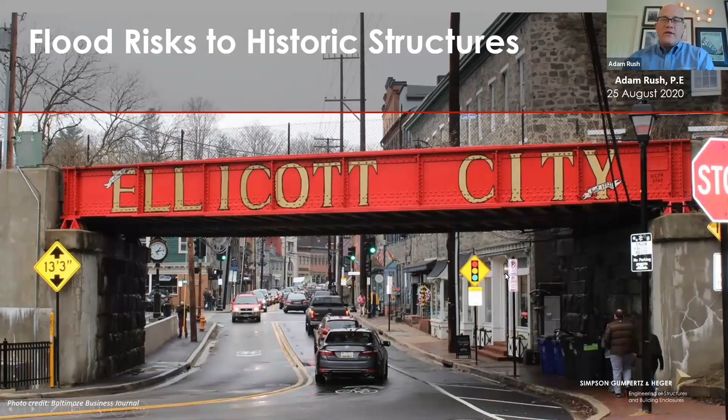So, kicking off, I'd like to talk about the outline real quick to try to give a sense of what we're going to cover today. So we're going to start off with the background for Ellicott City. We're going to talk about the history of the town a little bit. We're going to talk about the recent floods that occurred there. And we're going to talk about what are the goals and what are they doing to move forward as part of their recovery effort. And from that, we're going to focus on one specific building to help tell that story, and that is Caplan's department store, as you can see in this photo here.

The location of this structure is at a critical juncture within the city, and there's a lot that is going on with this building and the preservation effort behind it that really tie into the larger flood concerns and larger preservation concerns for Ellicott City. Now, we're going to use Caplan's to talk about a conceptual flood mitigation study that would occur using code prescribed methods and procedures in order to understand how to think about flood mitigation for historic structures.

Then we're going to take what we learned from that conceptual study, we're going to bring in the recent history and the efforts going on throughout the city, wrap it up to talk about how that ties into the project moving forward with Caplan's, and open it up for questions at the end of the presentation.

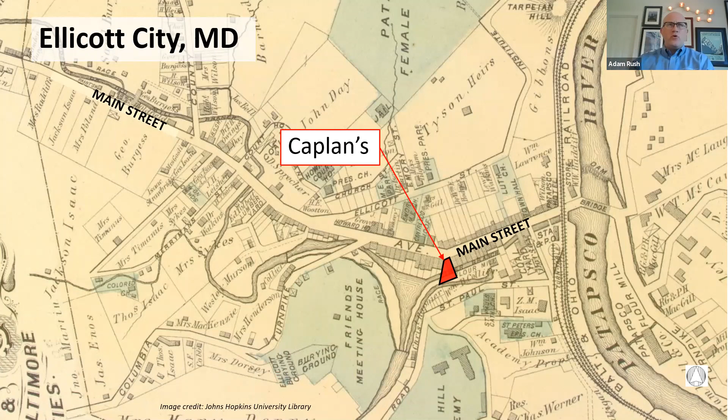The Patapsco River runs from the north to the south, and Main Street crosses the Patapsco River near the east end of Main Street. I'm going to put on a highlighter to try to point things out, and hopefully this works. We'll see how that goes as we move along. So Caplan's department store is located at this corner on Main Street, where Main Street turns in a bend.

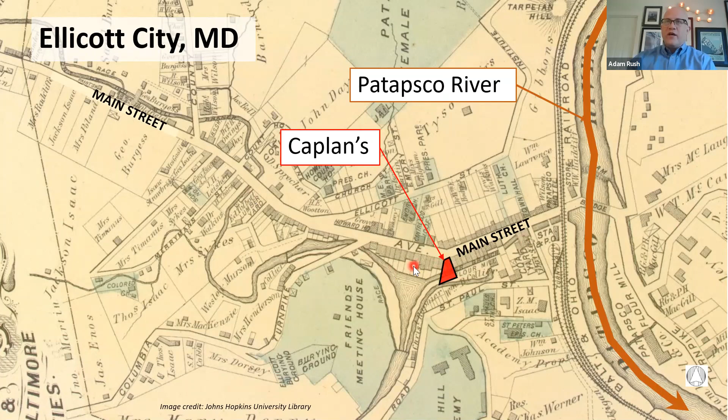So the location for Ellicott City was chosen for a mill town because of the confluence of a number of tributaries to the Patapsco River, creating a constant source of water in order to power the mills. And so they constructed Main Street along this channel where the Tiber branch meets the Hudson branch and New Cut branch and runs parallel to Main Street.

Now this city has a history of flooding, and traditionally floods would come from heavy rain events up in the watershed of the Patapsco River and would cause the river to increase in elevation and have the waters back up Main Street. So you end up getting high water levels, but the flow of the water is relatively slow within the downtown area.

However, due to development within the watershed of these creeks or these streams, we found that the nature of the flooding has changed for Ellicott City. Where before floods were occurring from the Patapsco River at the end of Main Street, slowly moving up Main Street as the water levels rose, they're now coming from the west and the north, where the watershed collects water and then quickly funnels it down through this channel in lower Main Street.

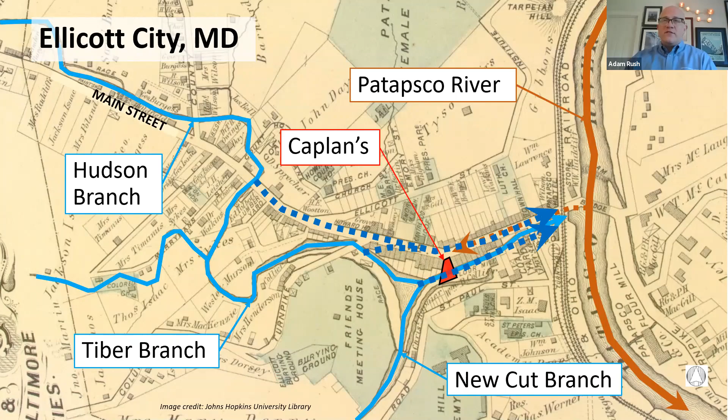And as a result, the water accumulation occurs much faster, and the level of flooding can increase in elevation pretty quickly, and the water movement is also very rapid. Now, to set this into a broader context, let's look at what NOAA is tracking for billion-dollar weather events for the last couple of years in climate disasters.

So NOAA has tracked damage from tornadoes, flooding, earthquakes, droughts, etc., and have tabulated the events for the past number of years. And as we can see on the table on the right, flood costs, though not occurring every year, can quickly accumulate, where one flood event could easily cause over $1 billion of damage. And this does not even account for all of the floods that occur that don't reach the $1 billion threshold.

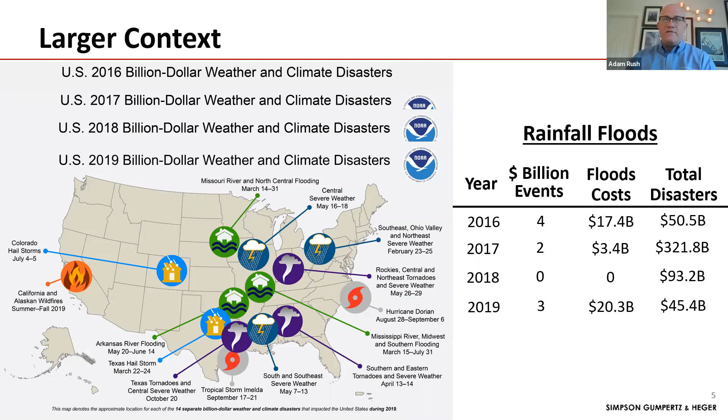So flooding is a major source of disaster, and it is a major issue that we need to confront moving forward. One of the challenges that we're going to face as a community is that projected total annual precipitation is also going to change due to climate change. So in areas of the United States, we're projected to see an increase in rainfall in the future. And so the heaviest 1% event per year, that occurrence is going to increase due to climate change.

As you can see, where we live in the DC metro area, here on the Potomac River, we're looking at, on the low end, a 20%, give or take, increase in heaviest rain events by late 21st century. So in the next 100 years, we're going to see a 20% increase, and then up to 40 to 50% at the high end of the range.

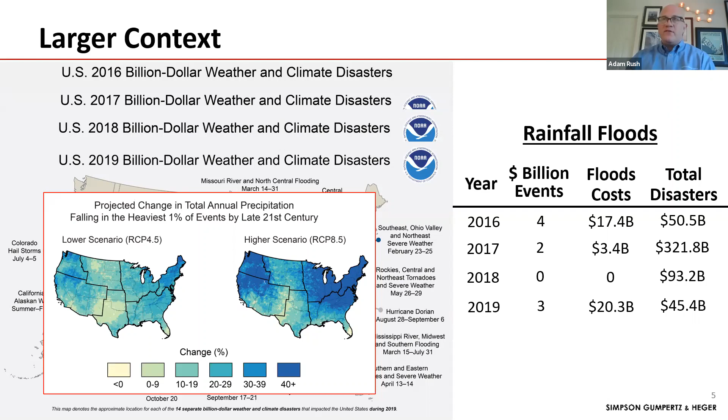So we're going to be dealing with a lot more water for our historic sites, and we need to take that into account as we move forward with our designs. So with that in mind, I want to go through a flood mitigation study using a code method in order to set the groundwork for what it is that we were going to look for.

So within this study, we're going to look at the framework: how do we put together this problem? How do we think about flood mitigation for historic structures? We're going to talk about that framework, and we're going to go into what are the flood risks, how do we deal with those risks, and then look at different mitigation strategies, and then come up with a potential recommendation for a project moving forward based on the data that's available. So this is all based on what is published and the codes that apply to Ellicott City. And we're going to use, again, Caplan's as our example to talk about this.

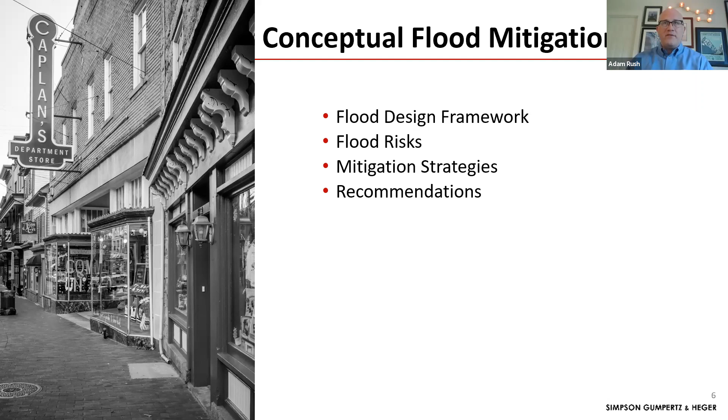So first, design framework. Thinking through this, we thought it would be helpful to lay out a recommended procedure, almost like a flow chart, to think through how you would tackle a flood mitigation project. So first, we would identify and communicate with the relevant stakeholders. Obviously, it's the building owner, then it's the design team, then you have the building code official, you have historic preservation review boards, and then other community organizations that also get involved.

And it's important to identify all of the relevant stakeholders early on the project so that they can be involved with the entire project as you move forward. Because with flood mitigation, there's going to be a lot of give and take and a lot of discussions that's going to require input and acceptance from many different levels.

One level to consider is insurance. So for larger projects where the building is not covered by the federal flood insurance, many private insurers are requiring more stringent design methods and assurances for their buildings that they are going to insure against flood damage. They're not just saying, okay, you can meet these minimum standards that's set by the code and we're going to give you a policy. They're saying you actually have to go above and beyond that. And that's why it's important to get all of the stakeholders involved early on in a project.

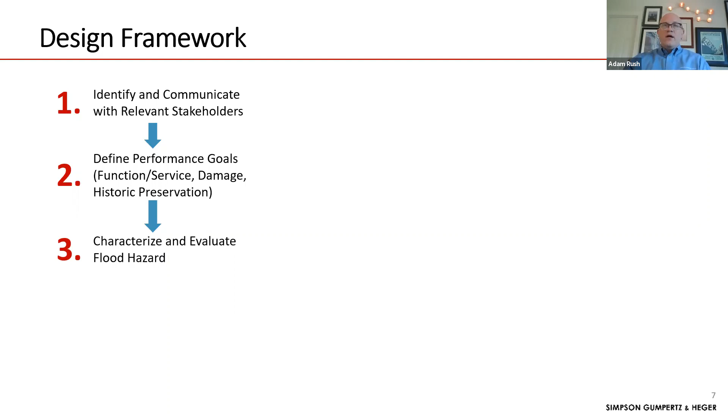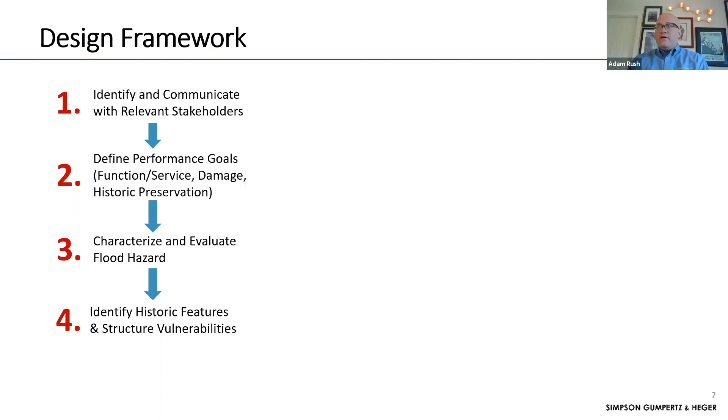Next is identifying the flood hazard, evaluate what the risks are and the criteria that you need to design for. You have to identify historic features and then vulnerabilities of your structure. And a lot of that is going to be based on the nature of your building. Is it a wood structure, masonry? And it's also going to be dependent on the nature of the flooding and how everything kind of interacts.

And then we come over to this fifth step, which really is going to be a bunch of steps that you have to keep checking and rechecking as you reevaluate your decisions. So you're going to determine what flood mitigation strategies you're going to consider. You're going to evaluate the flood resilience implications and how effective they are, develop feasible options, and you're going to try to balance flood mitigation and historic preservation and look at thresholds, essentially where you can't remove certain pieces of your historic structure because you would lose your historic designation. You could remove certain pieces and put them back. This is where, again, you have to make sure that you're constantly communicating with all the relevant stakeholders.

And then every project and the goals and outcomes and actual execution are going to be based on cost. And part of flood mitigation for these historic structures is not just project costs specifically, but it's going to end up being a life cycle cost that you should consider, because we want these buildings to remain in place for a long time, and we need to understand what sort of maintenance program is needed in order to continue to protect your building. It's not something that you simply install. It's not a new beam that you install. A lot of these mitigation methods require maintenance over the course of a year in practice and deployment.

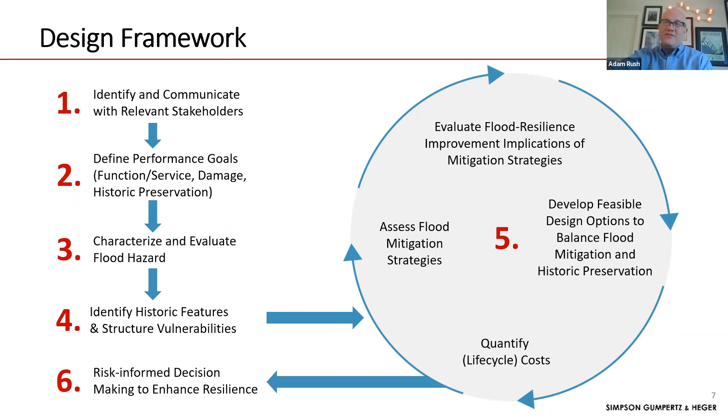So, for Caplan's, with a conceptual study, we start with the stakeholders, which would include the owners of this building, which are not the last name Caplan's. It's a private firm. Let's say they want to renovate it for retail, and they are working with the historic board in order to go through their plans and make sure that they keep the historic features that contribute to the district. So we're identifying all the stakeholders at the start of this conceptual flood study. And then performance goals, based on the nature of Ellicott City, up until recently, it has flooded periodically.

There has been serious damage from flooding; floods have come quickly and receded quickly. And so

I apologize, I just got a note that my internet is unstable. Hopefully we don't get too choppy of a presentation here. I apologize if we do.

But we define the goals. Let's say the owner wants immediate occupancy. That means they have a very stringent design in order to keep waters out and keep the damage low, so that as floods come and go, they can keep the building open once the waters are gone.

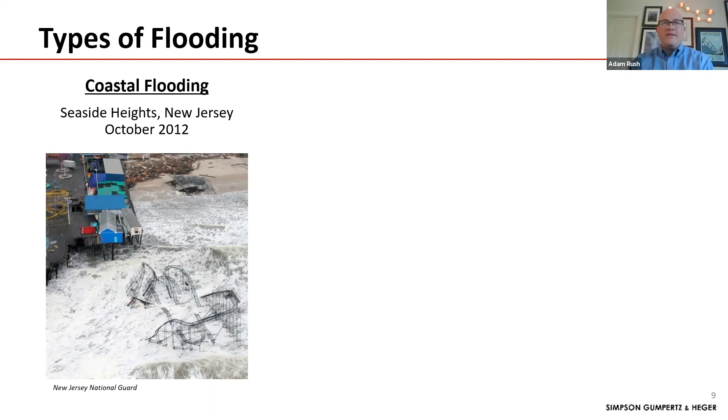And there are many historic communities that are looking at what these projections are for the future and trying to determine how do we address them moving forward. Another type of flood risk is riverine flooding. And this is very common around our area with the Potomac River, Anacostia, and in this case, the Patapsco River.

Riverine flooding can come from large rain events up within the watershed that may not even cause any rain at the location of the flood. So for instance, DC may get flooded because a tropical storm sets up in the Shenandoah Valley and just hangs out there for a while. And DC may not have any rain, but a large flood may come through regardless.

Another potential flooding characteristic of riverine floods are rapid floods from rain events, or flash floods, where water accumulates quickly, and where it gets funneled through the flood channel, you can get really high water velocity in those areas, and that is extremely dangerous and extremely destructive.

So there's a lot of design requirements and a lot of regulatory hurdles that you must be aware of and go through if you're going to be within a flood path, or, now the term is escaping me, unfortunately, within the course of a flood.

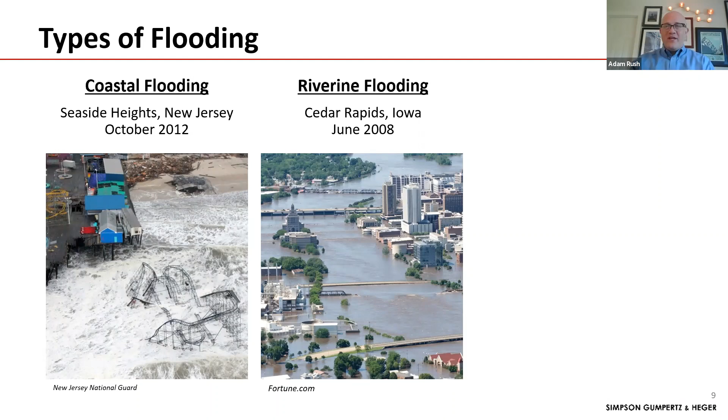Then there's local flooding, and this can occur from heavy rain events where water can accumulate quickly. However, it's not really centered around a river per se. It's more of a stormwater management problem, where the water volume and rate is too high for that stormwater management to accommodate, and water can accumulate and cause local floods. And that can also cause local failures, particularly at culverts, etc.

And it is something that is not currently covered with FEMA maps, but there are plenty of local jurisdictions that are working with ArcGIS programs in order to model rainfall events and look at spots where, at a particular low spot, you could get local flooding.

And so anytime you're dealing with a project where you look at the topography and it looks like you're at the bottom of a hill and a lot of water could accumulate to your site quickly, chances are there are resources within the local jurisdiction to evaluate those areas. And that's something that one of our teams in Simpson Gumpertz works on as well.

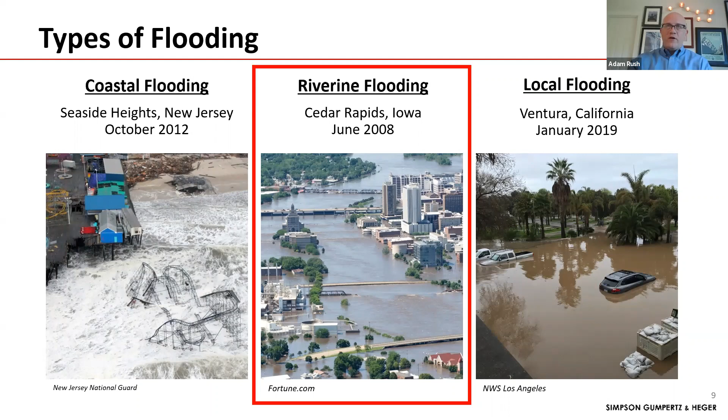So we talked about all the different types of flooding, and for the rest of the presentation, we're just going to focus on riverine flooding, because that is the type of flood we had at Ellicott City, and the rest of the challenges associated with flooding are going to be surrounding riverine flooding.

So let's look at flood hazards and how do you legally define a flood hazard. And currently we use FEMA FIRM maps, so flood insurance rate maps, where using different hydrologic and hydraulic studies, I always mess up those words, I apologize, we set the elevations for floods. And from these maps, we determine what the hazards are for a particular project.

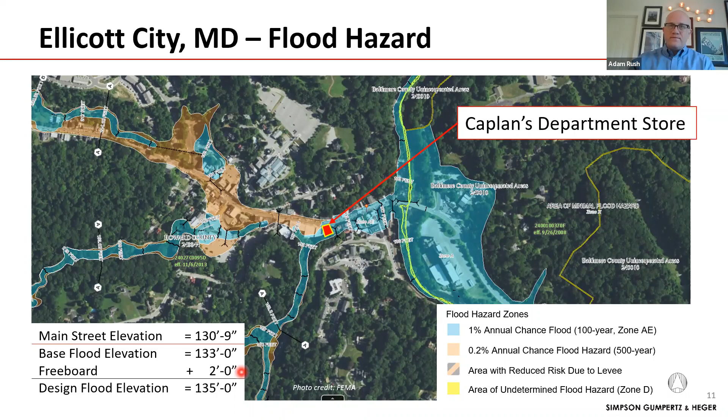All right. And now we come back to the flood mitigation framework and we say, okay, we have our structure. What are the historic features? What does it look like? So far, I've only shown you the facade as viewed from Main Street, and that's because that's the historic portion of this building. It contributes to historic downtown, and it's actually included in the Secretary of Interior standards for historic properties for treatment of storefronts.

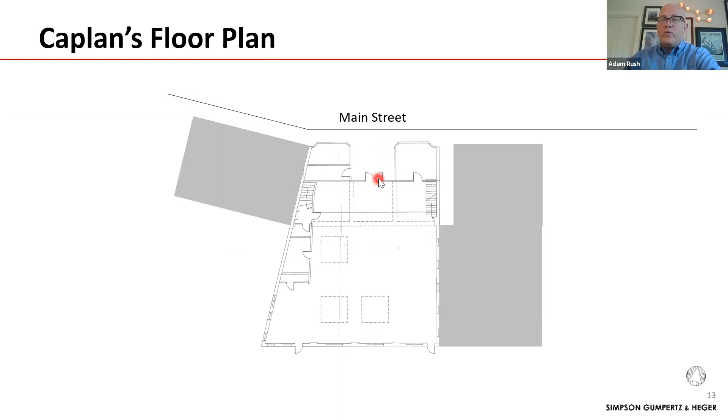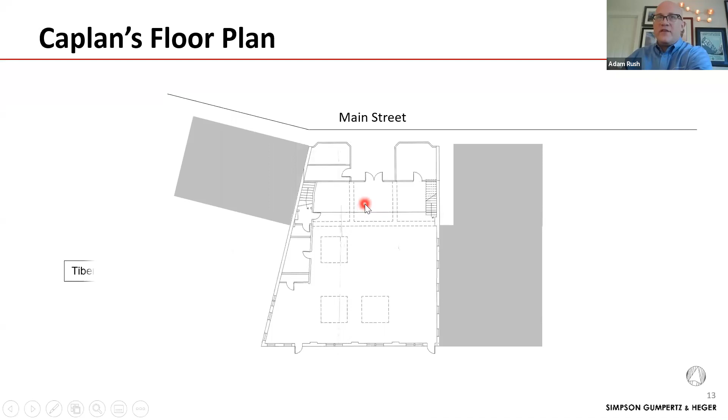There we go. Okay, let's talk about the rest of the building and get a sense of what we're dealing with, because that is very important in how we analyze the flood hazards and how we try to address them for our structure. So this is a floor plan looking north. Along Main Street, we have our entrance, and then the first floor right off of Main Street. It actually slopes up, believe it or not. And the interesting thing about this structure is that it actually extends over the Tiber branch.

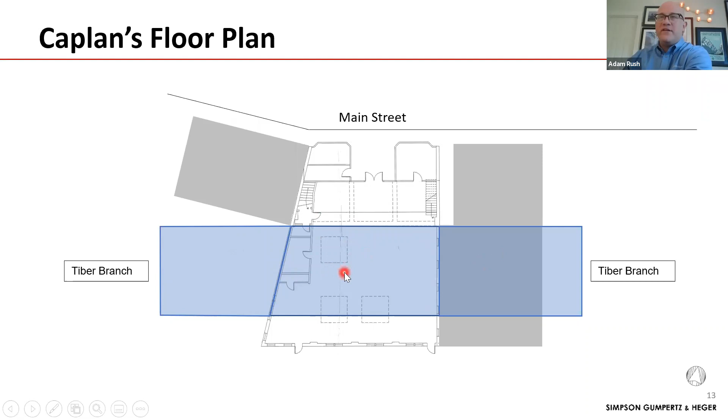At some point during the history of Ellicott City, building owners started to construct their structures over the Tiber branch in order to increase their square footage. Some of the mills may have done this originally to have their water wheels in the Tiber branch to generate power, but the retail spaces also copied that procedure. Now let's look at how this building looks in section and get a sense of what we mean when we say it extends over the Tiber branch.

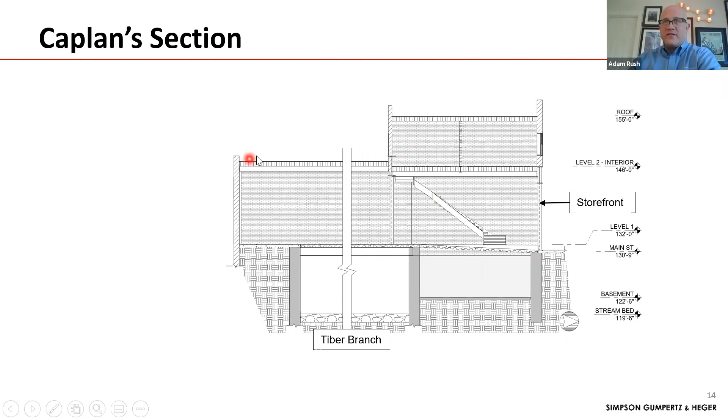So Caplan's in section: we have our storefront at Main Street, come into the first floor, and it does have a basement. It also has a second floor with roof access. Below the first floor, it extends over the Tiber branch. From below, we see steel framing supported by flood walls in various states of repair and periods of construction. Portions of the flood walls are concrete, other portions stone, and in some locations brick is corbelling out to pick up existing party walls. And so this is what we see from below the structure.

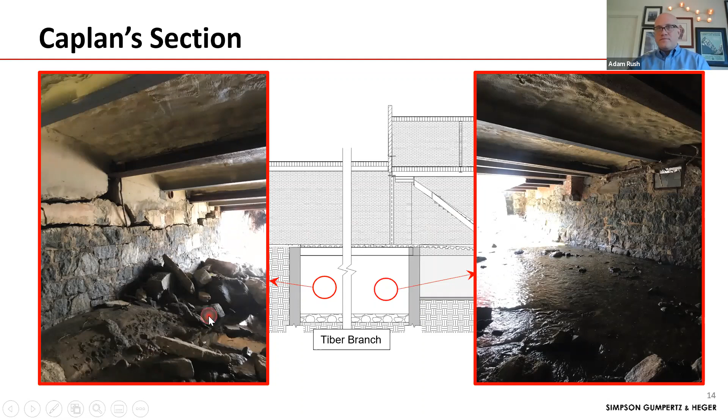So what does that mean in terms of the flood? What kind of risk do we have to address for our flood design? As a reminder, we have the base flood elevation about 1 foot above the first floor, and the owner would like to be able to open immediately. And so based on the code, we say, okay, that's another 2 foot of freeboard that we need to accommodate.

When we look at the floodwaters, we see that we have water rising at the front and within the Tiber branch. And so there are 2 sources of damage to consider for flooding. One is water infiltration and damage to your finishes and your structures through water damage. This building is susceptible to water infiltration through the storefront, through the storefront doors, and also through the basement walls, water moving up through the floor and then coming from the end wall as well.

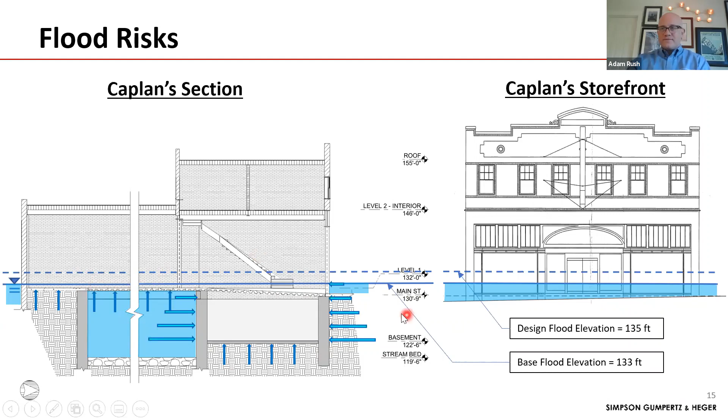The other aspect you have to consider is hydrostatic pressure on your structure, and that is the lateral pressure of water from the weight of the water on your building features. And in this case, we have uplift pressure on an elevated structure because the water level for flooding is actually above the first floor framing elevation. So let's go into different mitigation strategies and talk about whether they're appropriate for our condition.

At an individual building site or equipment, we tend to resist the demand from flooding, and that is usually how we mitigate the flood risk to our structure. We can't really reduce the amount of flooding upstream. We can only address the results once it gets to our building. So the first options of relocation and elevation are historically and obviously the best way to avoid flood damage: get out of the way. Of course, we'll look into those in more detail.

Then there are different types of flood barriers available on the market, and when those are appropriate and when those aren't. And then there is wet floodproofing and dry floodproofing. All of these options have to be considered for each individual site in order to address the flood resistance.

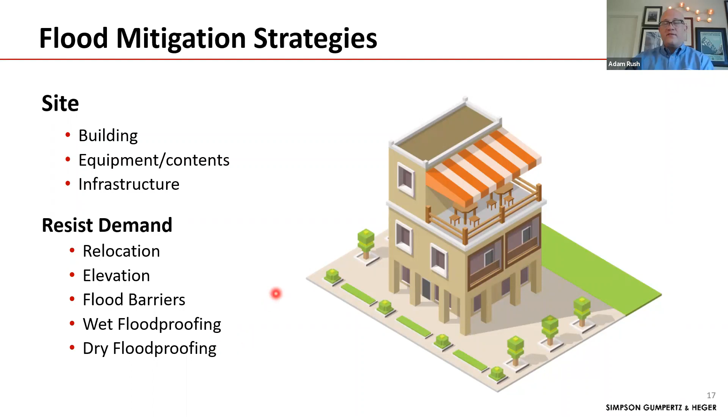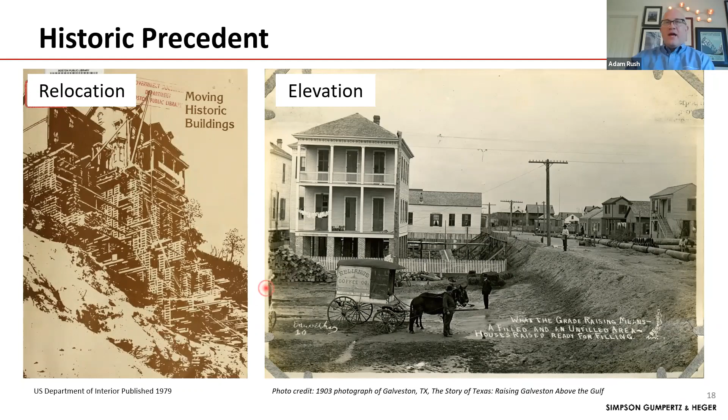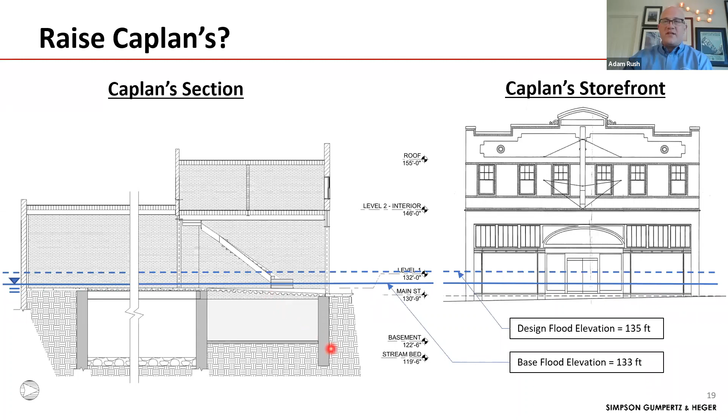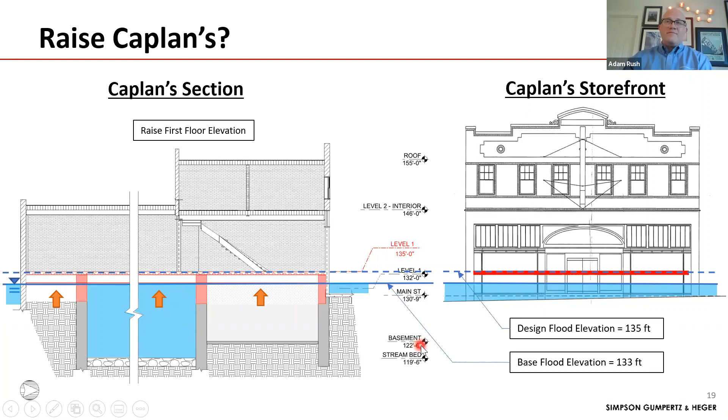As I just said, relocation and elevation are historically used in order to avoid damage from future flooding. However, at Caplan's, we obviously can't move the building off of Main Street because that's the whole character contribution to the historic city center. We discussed briefly maybe raising the elevation of the first floor. However, that's not really achievable with how it interacts with the streetscape. And so elevation and relocation are not options.

So we can talk about flood barriers. Flood barriers come in many different shapes, sizes, and concepts. You can have temporary flood barriers or temporary flood gates like the Washington Harbor on the Georgetown waterfront, where if they receive a warning from upstream on the Potomac, the building management comes up and raises these floodgates in order to keep the water out from this sunken patio area.

However, if they don't get the gates up in time, there have been occasions of flood damage from past events. So flood gates and flood barriers typically are temporary systems that have to be raised and lowered in the event of flooding. Sometimes they can be automatic, with buoyancy weights that automatically push up the gates so that you seal off your building or structure. But many of them have to be deployed prior to a flood, and there are plenty of instances where you have to consider all the ramifications of that.

Now for Caplan's, we don't really have the option of deploying floodgates to keep the water away from our building because our building is tied into adjacent structures and the floodwaters really need to go underneath our building already. So obviously this is not an option for Caplan's. That leads us to wet floodproofing and dry floodproofing.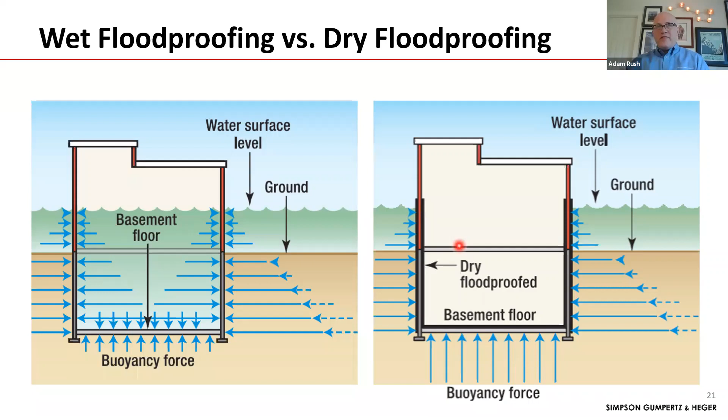With wet floodproofing, we let the water in, hence the term wet, and we balance the hydrostatic pressures as a result. With dry floodproofing, you keep the interior substantially dry, and you have to resist the flood pressures as a result. Looking at the two in comparison, I find helpful in thinking through the detailing. Now, there are other requirements and restrictions with wet floodproofing and when you can use it. Some of these apply to historic structures, but for many of them you can get exemptions for historic structures.

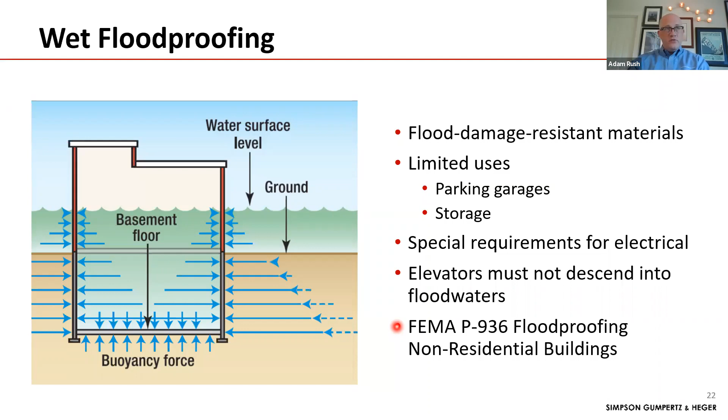So when you have a historic structure and you're looking at a wet floodproofing option, it's really important to look at your finishes and consider what can be wet and then dried out and what's appropriate and what isn't. Because a lot of code officials will allow you to pursue options for wet floodproofing for historic structures where in new construction they would not.

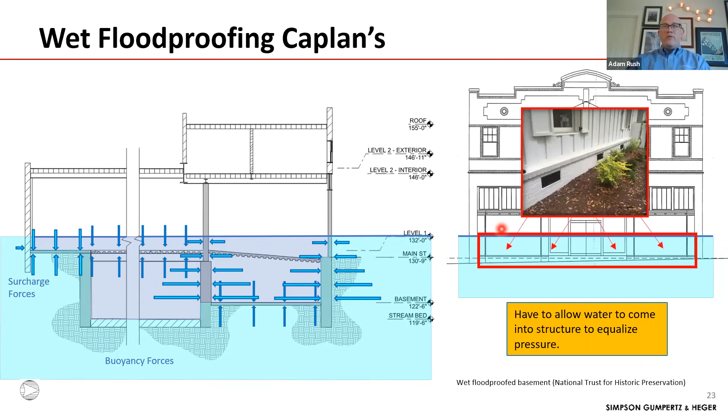So for Caplan's specifically, if we were to allow the building to flood, we would have to make sure that we manage the water entrance and exit in order to keep the pressures stabilized. And then we'd have to detail the storefront finishes and interior partition finishes such that they can get wet and then dry out.

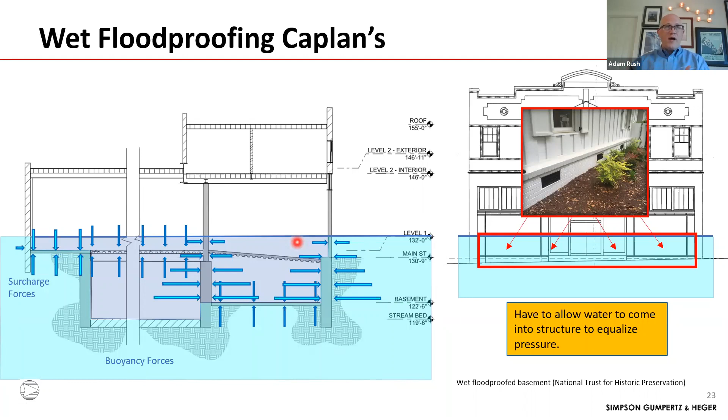Now, dry floodproofing is notoriously difficult with historic structures because there are plenty of pathways for water to enter the structure that are difficult to seal. You think of masonry, you think of joints in masonry with different framing, and you think about windows and doors, and the pressure from the water against your structure causes what would be a leak resistant building construction otherwise to all of a sudden be very porous.

So a mass masonry wall, for instance, where water wets the outside, but it's not constantly forced into the masonry, the mass masonry wall will keep most of that water out. It will absorb some water and it will get wet, but it won't constantly pull all the water into the building. When you have a flood, that water is now being forced into your structure, and different materials will allow more of it in.

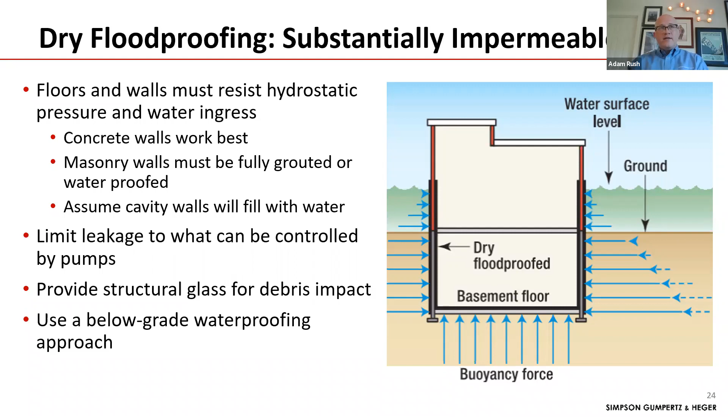And there has been recent testing by the Park Service to try to look at different historic materials and kind of quantify their performance under different flood considerations. However, it's still a challenge in detailing and coming up with a system that you can justify in the long term.

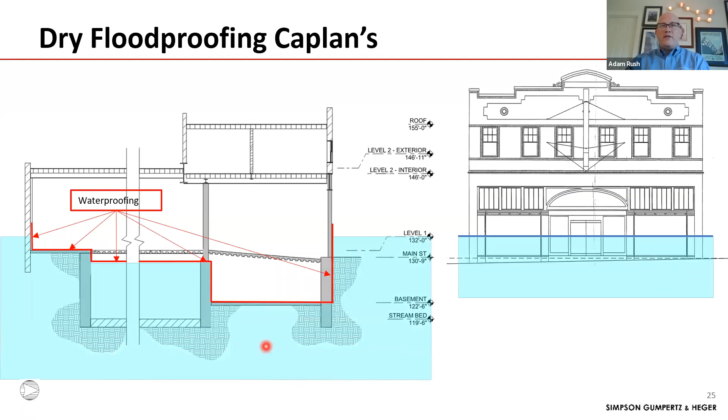So for Caplan's, for dry floodproofing, we first have to establish a barrier. Where do we want to keep the water out? And this line is schematically shown. There are pluses and minuses to put it on different sides of walls and slabs. And then you look at the flood demands on it, and you have to detail all the connections in order to resist that.

So let's look at one more detail in general to discuss, and that would be at the storefront. A lot of times, in order to resist the hydrostatic pressure at the front of your building, you need a concrete wall or a solidly grouted CMU wall in order to resist the water loads. You also would tend to need temporary gates at your entrances.

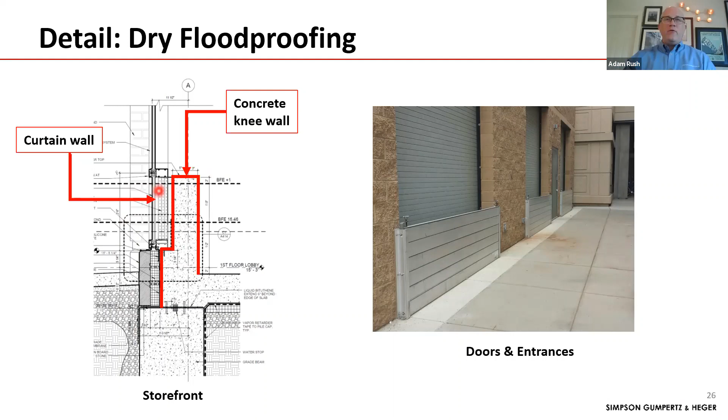Now, this sort of construction can be difficult for historic properties if your historic finishes are deemed historic on both sides of your wall. However, if you're in a case like we were at Caplan's, where the finishes are the storefront as seen from the exterior, that gives you some flexibility to play with on the interior and what you can do and what you can see. And again, different floodgates have different benefits, and a lot of times you also have to consider, particularly for tight sites, encroachment into the public space and their sidewalks.

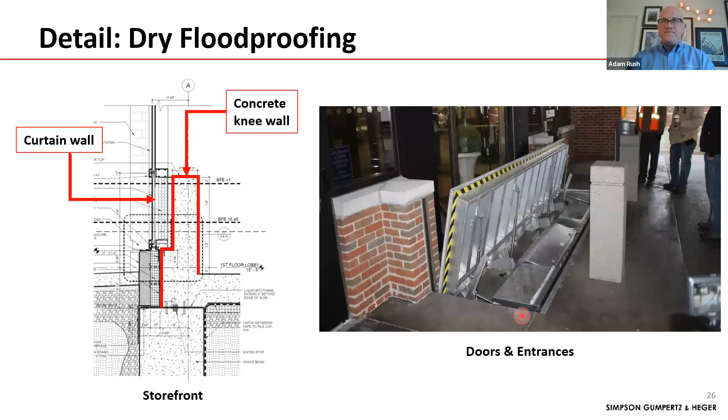So going through this conceptual design procedure, looking at Caplan's, we realized that there are many strategies that are just not appropriate for this structure, and we're left with wet floodproofing and dry floodproofing and some give and take with that. And so that is the kind of conversation that you would need to have with the building owner and all the other officials that are able to make decisions on your project.

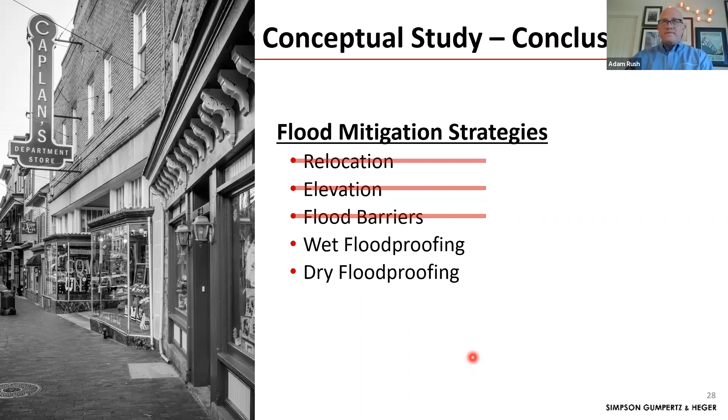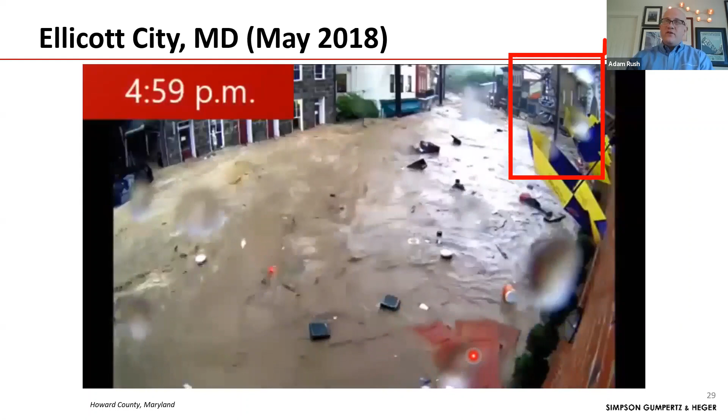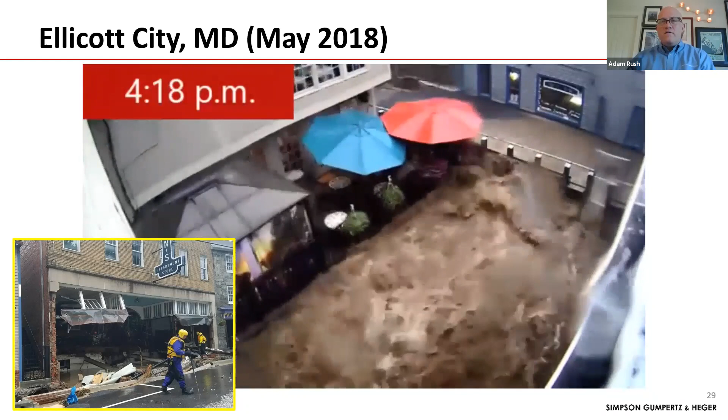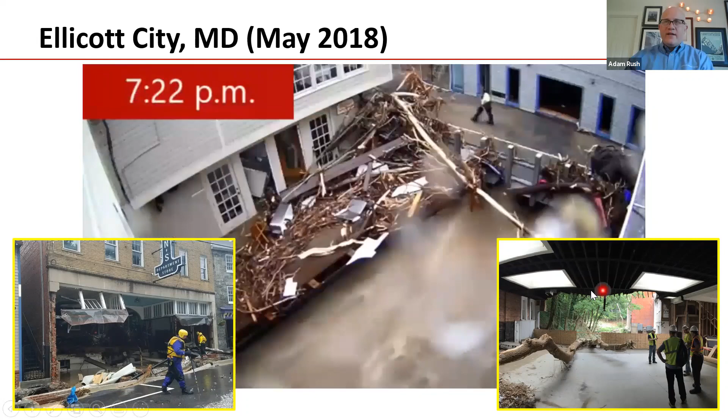Now, how does this relate to what actually happened at Ellicott City? Well, this was an event from 2018. As you can see highlighted in this box up here, we have Caplan's on Main Street, and it was just devastated from the flash floods. The flow rate for the water reached up to 10, 11 feet per second. It was around 7 miles per hour. To give you a sense of force that can create, Caplan's is the first building over the Tiber River, and anything that blocks or impedes the flow of water is now subject to severe damage as a result.

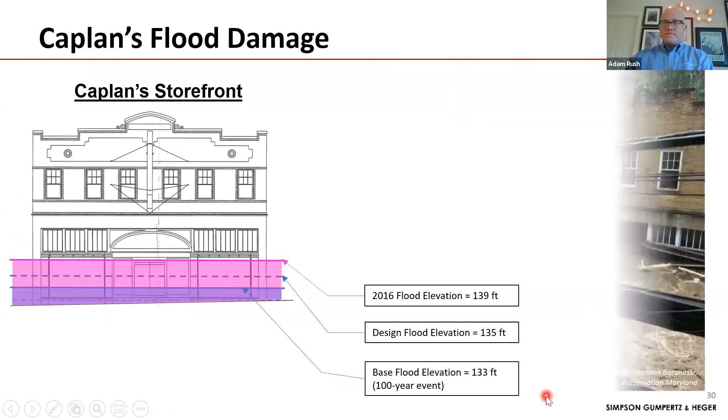So we have the base flood elevation of 133 feet for a 100-year event. 2016 was a slightly worse flood event than 2018. The floodwaters reached 139 feet. So that's 6 feet higher than the base flood elevation, and that's 9 feet above the first floor. You couple that with the momentum of the water, the speed, and the forces are enormous. It's just not possible to resist that with glass curtain walls.

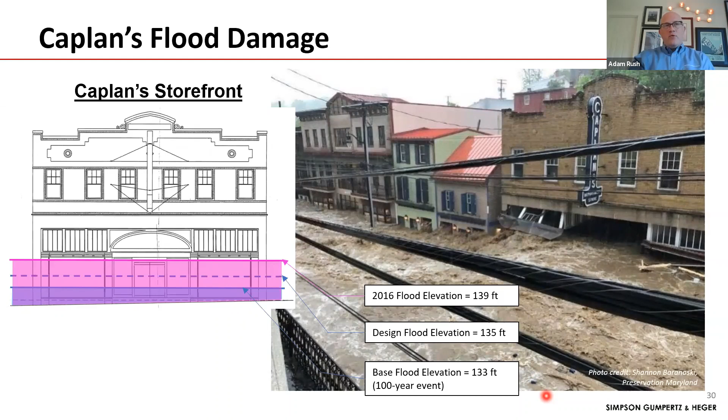And so this leads into an interesting conversation that needs to occur for this project and likely many other communities. And that is, where as an individual building owner, are you able to resist the flood events? And where do you need to draw on other resources? When do you need to consider flood mitigation strategies on a community level?

And so where we have individual site level, we're really resisting the demand that meets the building. Where we have a community level, we're trying to limit that demand as it comes to the building. And so at communities, we have retention systems, diversion channels. These are the dams, flood walls, storm surge barriers, and city planning. How do you manage stormwater?

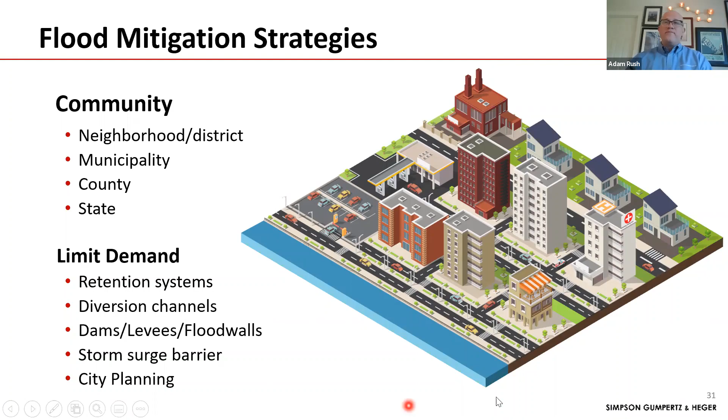And we've been working with Howard County, and this is generally their approach, is we need to reduce the flood hazard to lower Main Street from upstream. And so they're looking at installing upstream retention ponds, and nets and catches to capture debris.

And then also diverting water around Main Street so that the funnel points where water backs up and then causes more rapidly moving water in really high flood elevations, we're trying to reduce that flow. And so we're looking at a tunnel to the north of the city, and then enlarged culverts right as the Tiber branch enters the Patapsco River to help deal with this demand.

And then finally, we still have a significant amount of flow coming through the Tiber branch, even with all these other interventions. So we need to look at how can we widen the Tiber branch to accommodate that volume of water and not allow it to jump onto Main Street.

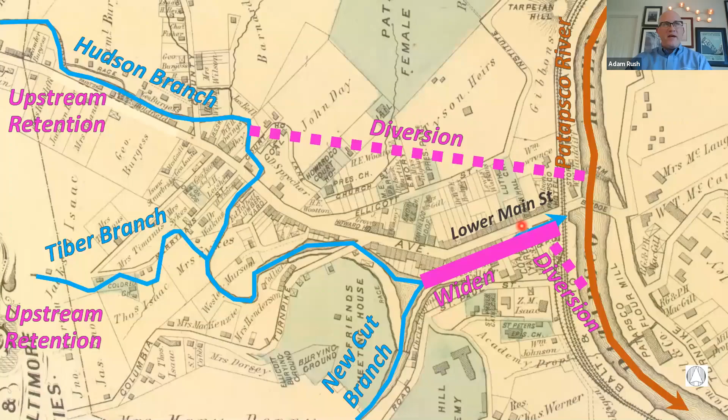And so with all this modeling that is done, we said, okay, if all of these interventions are installed, what do we see? This is a flood elevation map of the 2016 event. And you can see on Main Street, the floods get to 8 feet or more above Main Street elevation. But then if you also look at the Tiber and Hudson branch, as it comes down and runs parallel to Main Street, it hits Caplan's department store, and it's actually forced down, and that caused a lot of flooding to punch through onto Main Street.

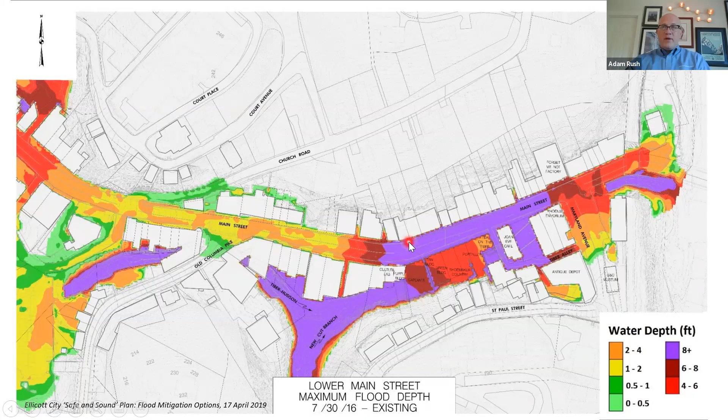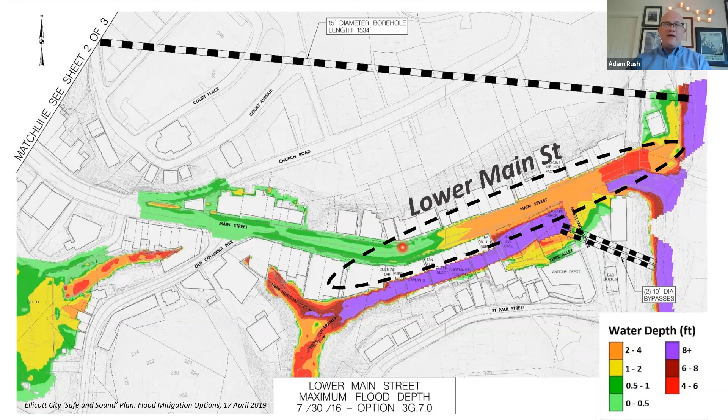Now, once all these interventions are installed, looking at a 1,000-year flood event, which I forgot to mention is a 0.1% chance of occurring every year, that's how it comes up to a 1,000-year event, we find that the flood elevations decrease at Caplan's from plus 8 feet to right around 1 foot in front of the store. So for a 1,000-year event, the flood at the front of the store more or less gets back to the 100-year event before all the mitigation efforts on the community level were installed.

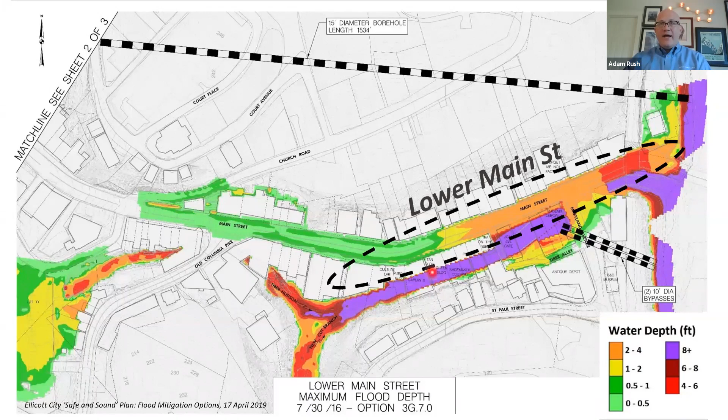Looking at the channel, we see that the 1,000-year event still has really high water elevations behind Caplan's. And so what does that mean in terms of historic Main Street? And this is the plan for historic Main Street in order to accommodate the high volume of water. They want to have a nice park at the lower Main Street where there's enough room for the water to accumulate and make its way to the

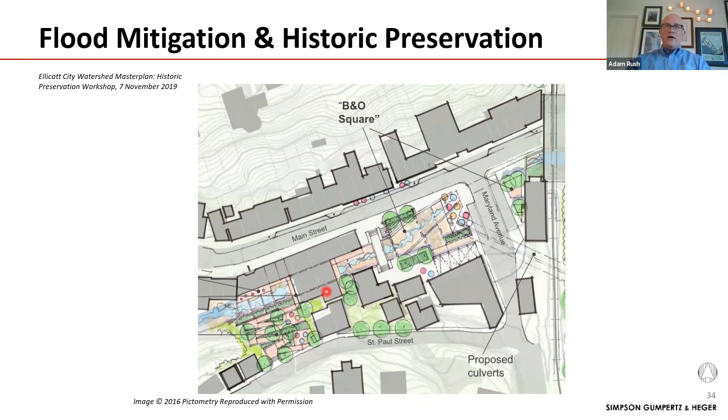Patapsco River. So right now, the river is constricted by a channel or culvert that runs underneath the train tracks and underneath Maryland Avenue. So they're going to increase that flow with additional culverts further downstream, allow for more water to accumulate, and then because the water elevations for a 1,000-year event are still so enormous, we're looking at removing structures that currently extend above the Tiber branch and allowing the water to rise in elevation as needed in this area. And the one structure that still extends above the Tiber branch, the first floor will be removed. So essentially, we'll gain a whole story height of clearance for the water to flow.

So looking at the current construction in that area, what we see are a bunch of existing structures that are all contributing to the historic nature of the city. So Howard County, who is pushing and designing and spearheading this effort, purchased these 10 structures with the intent of giving them more flexibility in order to implement their flood mitigation measures for the entire city.

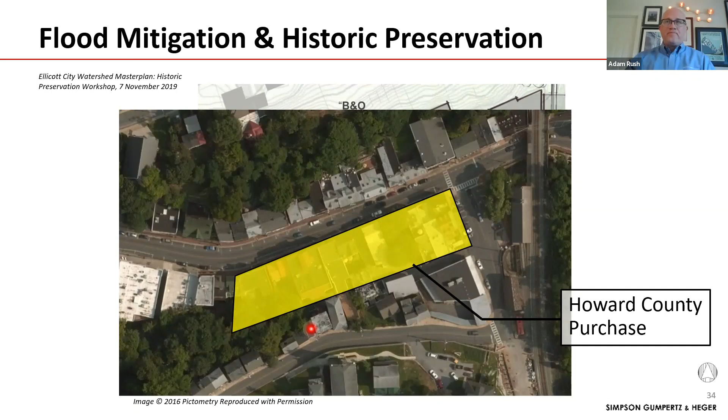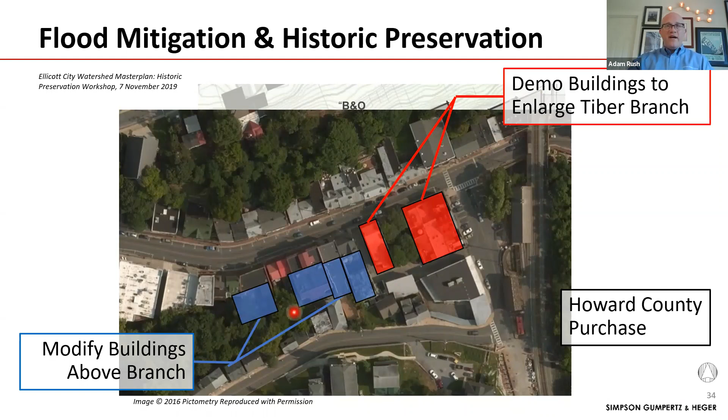Now, part of that plan, after much back and forth in reevaluation of the flood studies and looking at lots of different options, the current plan has settled on demolishing 4 structures out of that 10 and modifying another 4 to 5 structures that extend over the Tiber branch.

So coming back to Caplan's and tying all this together, we look at how does a community intervention impact the structure and impact the intervention that we do at our individual building. And we say, okay, we know that in order to accommodate more water, we have to get rid of this extension and at least get rid of the first floor.

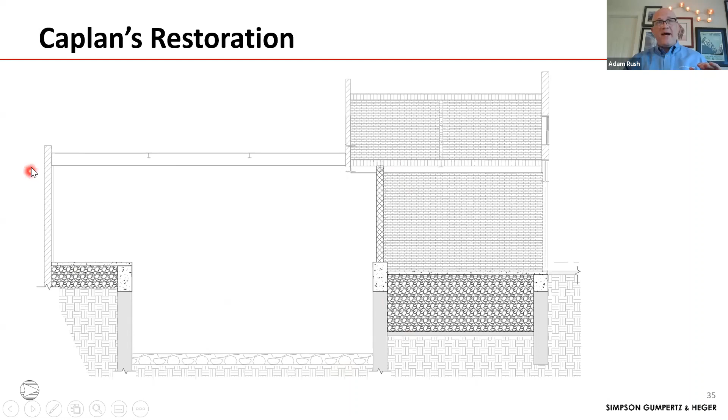And right now we have existing steel that we're keeping at the roof elevation in the back in order to brace this historic wall along the back. So we say, okay, now how do we design it?

Well, we start with looking at the 100-year flood elevation and what that looks like. And then, because everybody is really nervous about another 1,000-year storm, because remember, we had 2 of them within 2 years of each other. So within the past 4 years, we've had two 1,000-year flood events. Everybody is really jumpy and really nervous. So we want to check our design to see how it's going to fare for a 1,000-year event.

So the problem that we have in terms of design community is when you go to submit permits, this 1,000-year event is predicated on implementation of a lot of expensive intervention upstream, and it's not completed. It's still in progress, but we're doing renovation work now.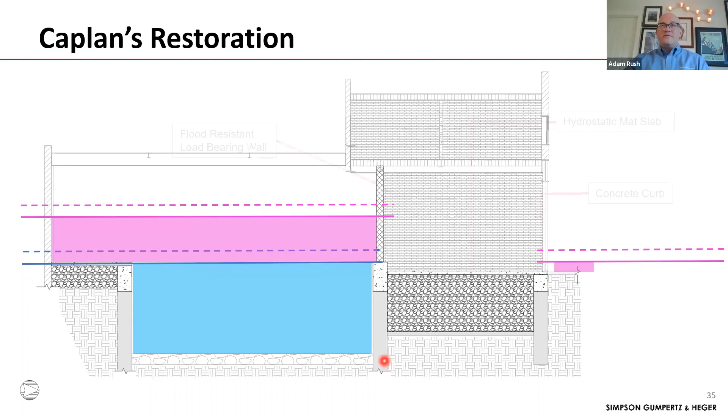And so what we decided to do is we said we have to meet current codes. So we're designing our structure and detailing the finishes in order to resist the 100-year event that's currently on record. We are using a 2-foot freeboard. And then we are also, because we're good engineers,

increasing the reinforcement and strength of this CMU wall at the back in order to resist the higher water pressure, with the idea that the actual rate that the water will flow through here is going to be greatly reduced as well. You know, there's still the risk of another 1,000-year event occurring before all this can be installed, but we're taking the best precautions that we can, given the information that we have.

So this is usually one of the big design questions regarding this specific building and this specific city: how do you think through the design process while we're still working on installing all the mitigation upstream? And eventually I imagine the 100-year flood elevations are going to be revised based on all of the infrastructure that's being installed. And as a result, designs downtown will likely be only for the future 100-year event after everything's installed. So this is another thing that's going to be interesting to see moving forward.

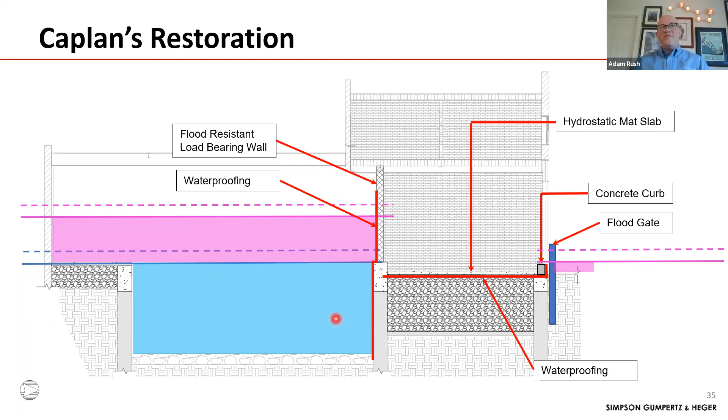And maybe that 100-year event also changes because we're incorporating data from the recent past and the rain event that's recently occurred. So let's just do quick concluding remarks because I've gone a little bit longer than I had hoped, but flood mitigation of historic structures is not prescriptive. There's a lot of give and take that has to occur.

Balancing mitigation and preservation is going to require a lot of communication, and there are plenty of instances where in order to address the real hazards on your structure, you're going to have to look at site or building level solutions as well as community level solutions and do some combination of them in order to meet a resilience that you'd like to see moving forward.